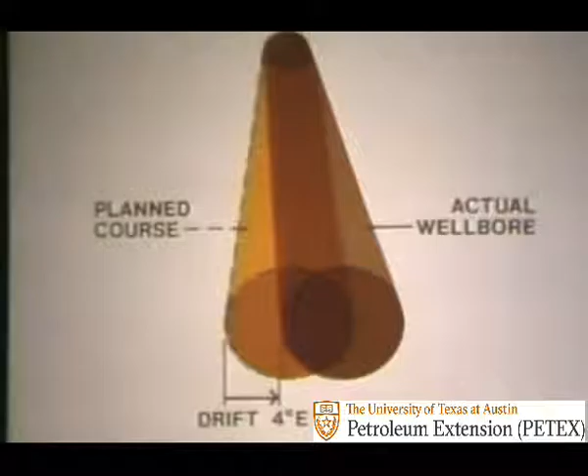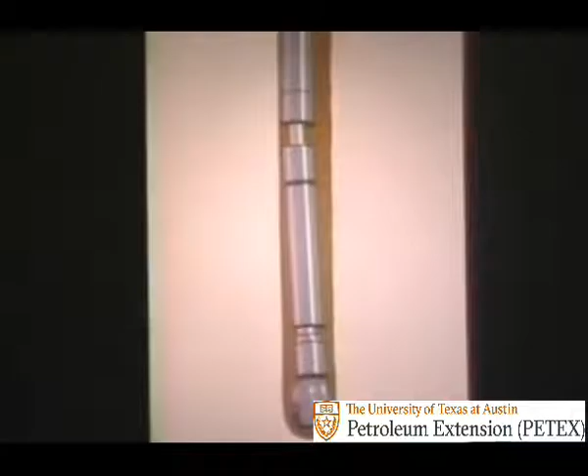So, they usually try to drill straight holes, like this. You know, the shortest distance between two points. But sometimes keeping the well straight isn't so easy. A lot of things, like different types of rock, for instance, can turn the drill bit away from a straight path. So sometimes they use stabilizers and other tools to try to keep the bit on a straight course. Not bad for amateurs.

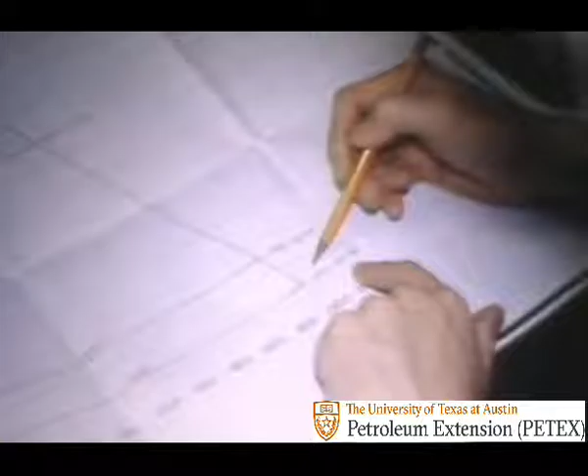Amateurs? Come on. Did you say amateurs, Gerhard? Ah, my friend, the drilling expert. He's back. Well, it's not that we don't trust you, Gerhard. It's just that we'd like a little more informed opinion on this particular subject. Informed?

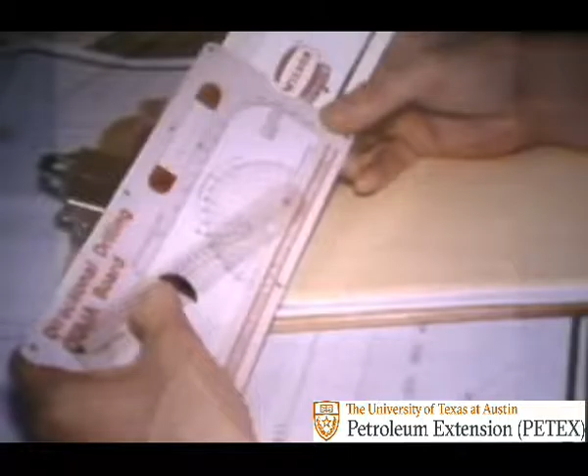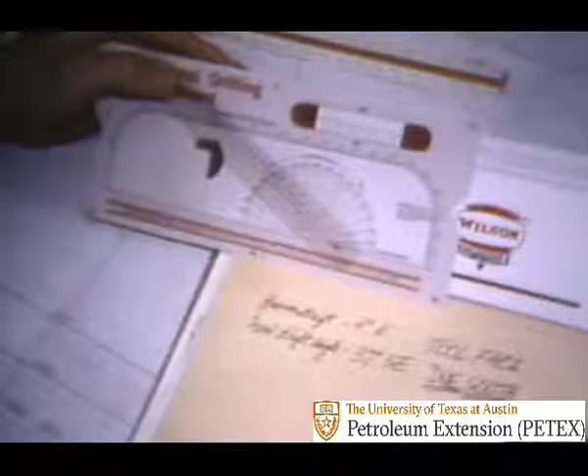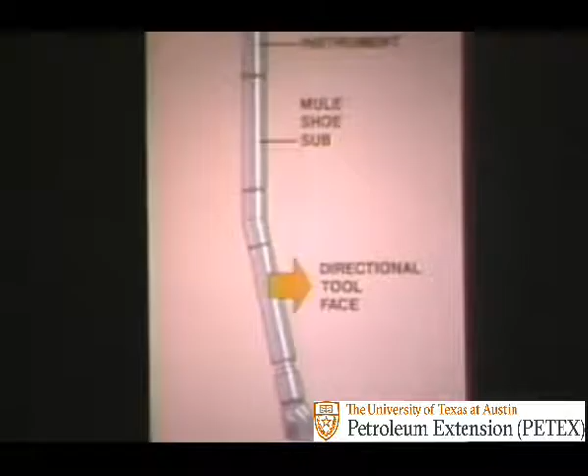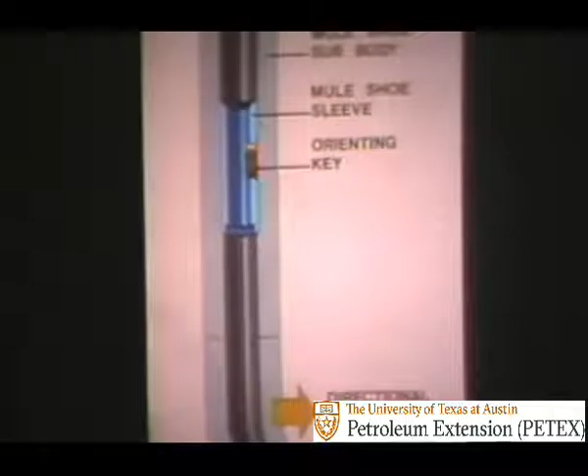For instance, you take straight hole drilling. You're right, it's important. But sometimes, as I was saying, drilling tools get stuck down hole and can't be retrieved. And sometimes we find oil in hard-to-reach spots like under cities. That's when straight hole drilling isn't practical. Then we have to curve the well. I was just getting to that. Curve it or deviate it just enough to bypass the problem. Now, we call this planned curving of wells or controlled directional drilling. Yes, controlled directional drilling.

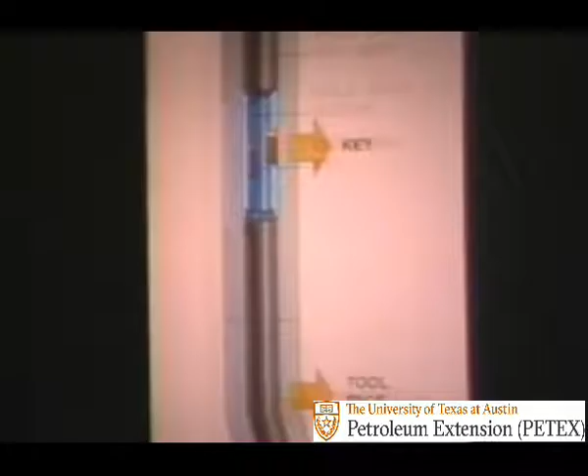Are you going to keep this up all day? Well, certainly. A little help now and then never hurt. Oh, of course, of course. Now then, where was I?

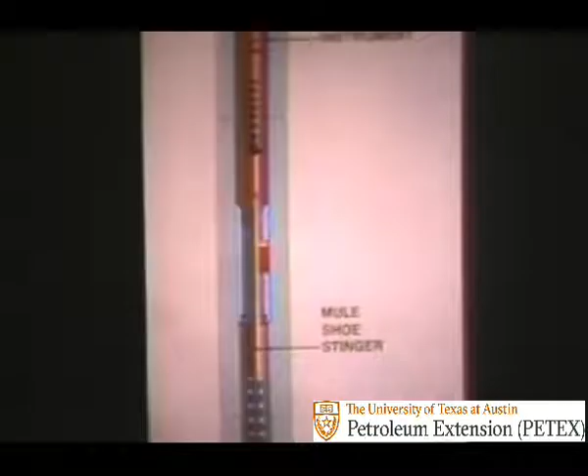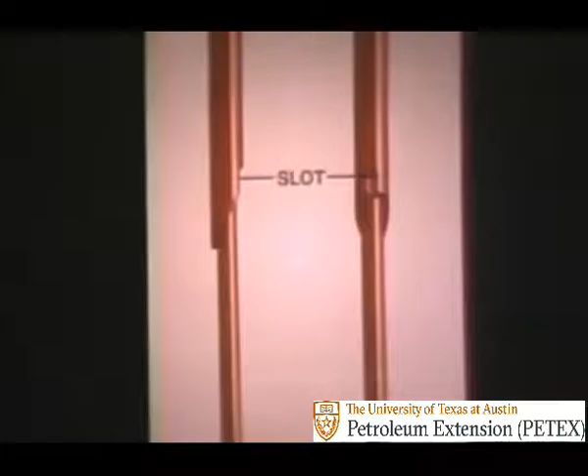Oh, yes. Directional drilling comes in handy whether it's used to correct a curving well bore that should be on a straighter course or used to drill a number of different wells from one rig, like they do offshore. Offshore drilling is expensive. The platforms and rigs cost a lot of money. But directional drilling makes it possible to drill up to 40 or more wells from a single platform.

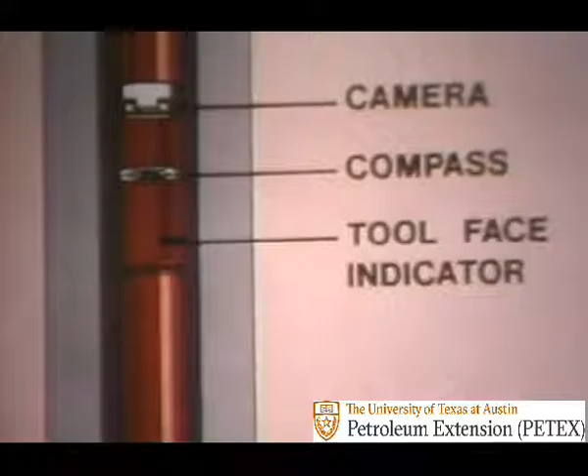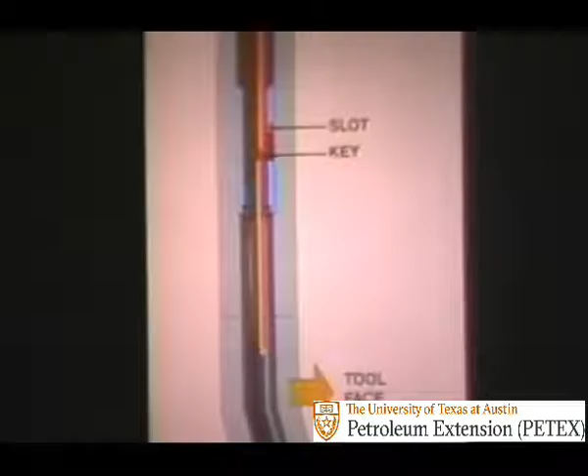Of course, directional wells are used for other reasons, too. Probably the most dramatic is killing an uncontrolled well. The directional well is drilled close by the blowing well and deviated toward the reservoir. Mud is then pumped into the well until it has been brought under control or killed.

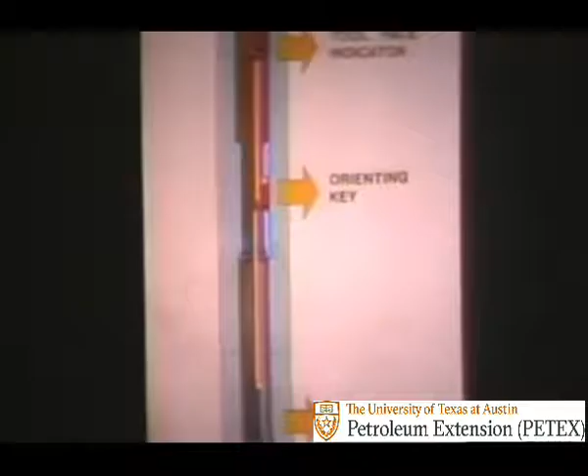To deviate or curve the well, a directional driller can use one of three basic patterns. First, he can deflect the well slightly at a relatively shallow depth, and then drill at a controlled angle to the production zone. This plan gives the driller the shortest and most economic path to his target.

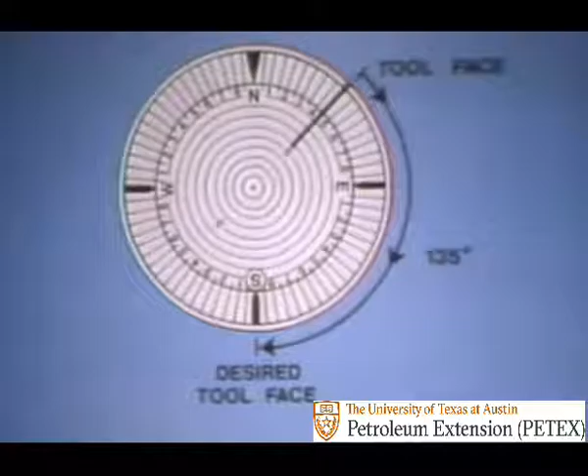Second, if he's offshore and trying to angle several well bores into a reservoir, or if the hole runs into some troublesome formations, he can deviate the well twice, once at a shallow depth and then again just above the reservoir. And third, he can keep the well straight until it's almost to the reservoir and then deflect it into the pay zone. This type also helps him avoid troublesome formations.

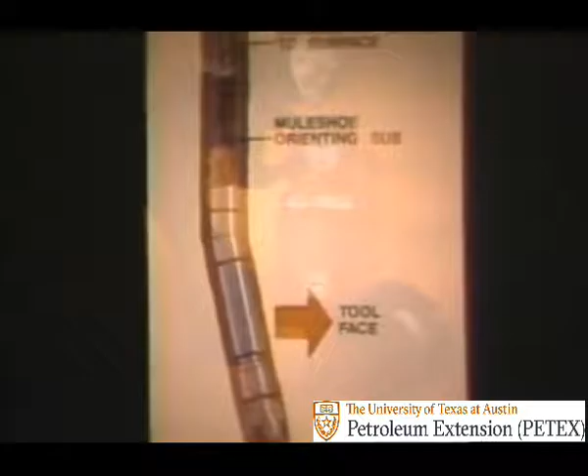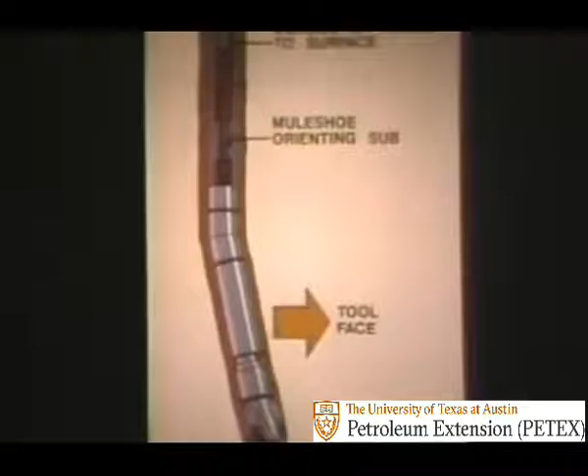But whatever type the directional driller uses, it's important that he control the deflections and keep the well bore on a planned course. Excuse me, a planned course? You mean you actually do some thinking ahead of time? Back again, Gerhard? Before a directional well is drilled, the directional driller and company plan the entire course of the well. Well, you should know that.

They make a horizontal and vertical outline of the well's path. They take into consideration things like location of the desired target, rig capacity, hole size, mud program, types of formations, and casing program, and plan the most economical course.

Once that's done, the directional driller drills the hole as straight as possible until he reaches the point where the deflection begins. Then, according to his plan, he starts the deflection from what's called a kickoff point, or KOP. From there, he builds the angle slowly, usually less than 5 degrees per 100 feet, until it reaches a specific number of degrees. He also angles the well bore in a specific direction.

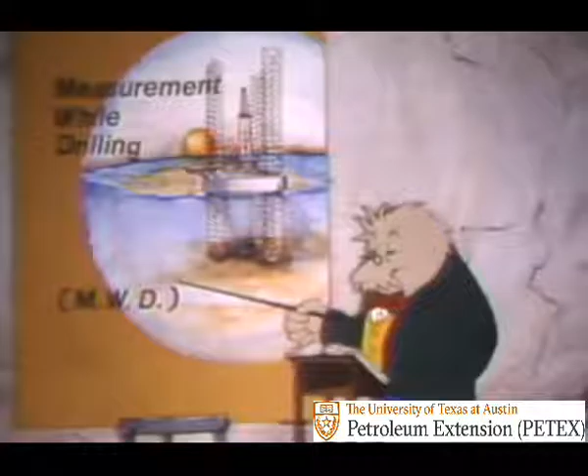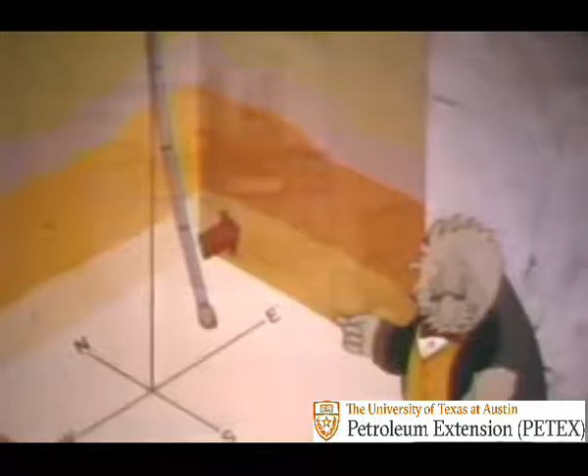Once the angle and direction are set, the part of the directional tool that faces this new direction is referred to as tool face. Now then, after the deflection is made and the tool face set, the driller continues in as straight a line as possible until he reaches the desired bottom hole target, or until he reaches a point where the path must change again.

Yeah, and what if the angle of the well bore increases more than 5 degrees per 100 feet, like this, huh? Or he inadvertently switches direction. I've seen it a million... Yes, you're right. Sometimes that does happen.

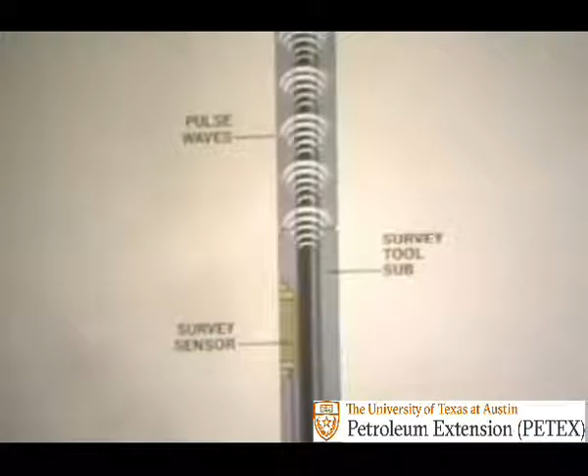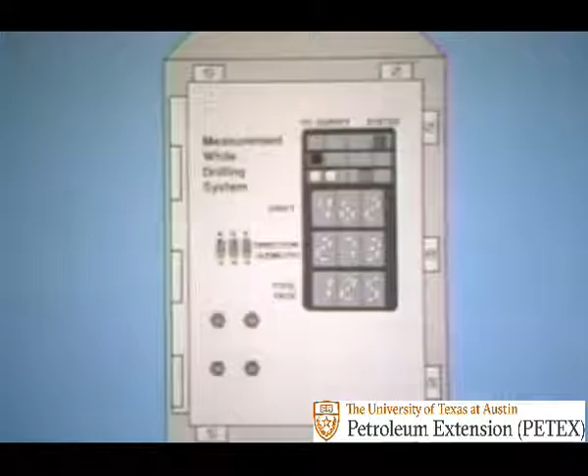So, a directional driller tries to limit the rate of change in angle to less than 5 degrees per 100 feet and keep the well bore as close to the proper direction as possible. Oh, that's much better. Accuracy is most important, you know, particularly for you.

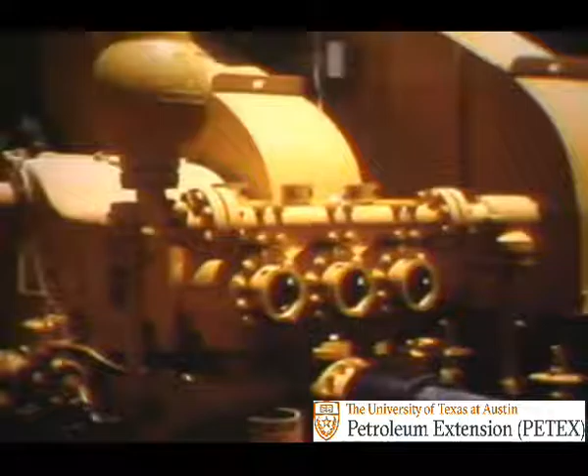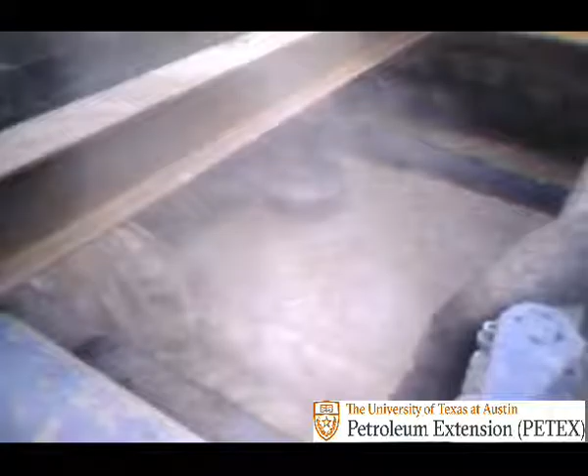Now, once the driller has a plan for his directional well, he'll need special tools to help do the job right. Let's look at... Tools? Did you say tools? Oh, have I got it? I do have a small collection here. Gerhardt, I think we had something a little more sophisticated in mind.

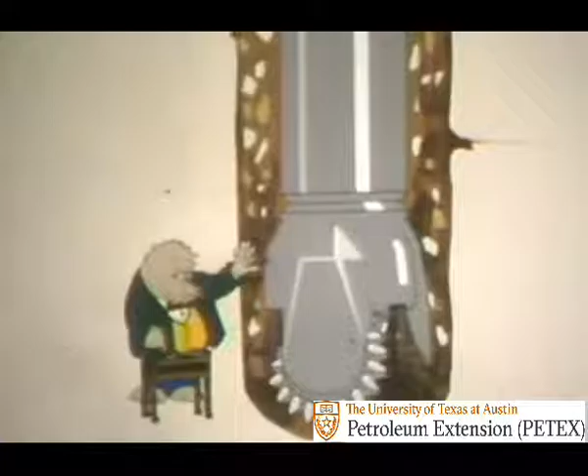Sophisticated? Well, of course. For instance, the driller needs special drilling tools like these that will drill the directional hole. And he needs survey instruments like these to help him keep track of the angle and the direction of the hole. Now, survey instruments help the driller see from the surface the exact angle and direction of the well bore. Exact, you say? And how do you do this?

Well, some of these instruments use photographic equipment, a magnetic compass floating in liquid, and a timer. And others use gyro compasses and pendulums with the photographic equipment and timer. But both types do the same thing. A camera takes pictures of the compass at different depths and records the angle and direction of the hole in relation to magnetic north.

By using these instruments, the driller plots the actual course of the well and compares it with the planned course all along the way. Now then, besides survey instruments, the driller uses special types of drilling tools to drill a directional hole. One of these tools is a downhole turbine motor. The turbine motor uses only drilling fluid to rotate the bit, not the rotary table.

The mud flows through the stationary drill stem and across the fixed stator blades. The stator blades direct the flow so that the mud is channeled onto the rotors. The rotors then turn the shaft that rotates the bit. This action allows the drill stem to remain stationary. This is important when drilling directional holes. You'll see why in a minute.